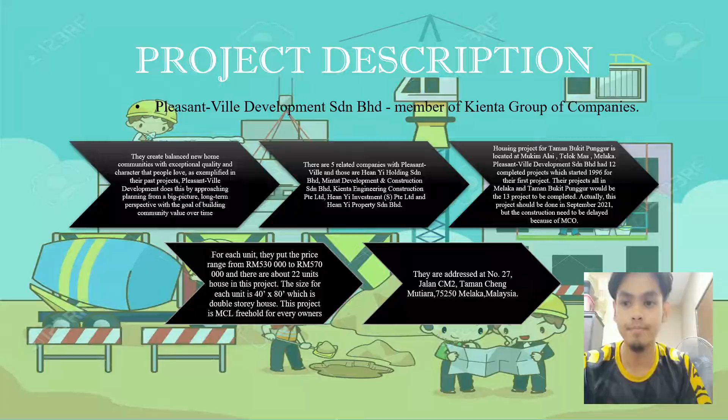Type of soil on site. So the type of soil on site we found is clay. Clay is the smallest particle amongst the other 2 types of soil. The particles in this soil are tightly packed together with each other with very little or no air space. This soil has very good water storage quality and makes it hard for moisture and air to penetrate into it.

It is very sticky to the touch when wet, but smooth when dry. Clay is the densest and heaviest type of soil which does not drain well or provide space for plant roots to flourish. And the reason why the house project can determine the type of soil is clay is because previously the construction site area of this house was a crop area and a paddy field area.

So the soil that is there contains water and the condition of the soil is moist. Similarly, the Telok Mas area is mostly a paddy field area, and the locals develop housing in the area. So next, there are a few advantages of clay soil. They can hold more total water than most other soil types, and although only about half of this is available to plants, crops seldom suffer from drought.

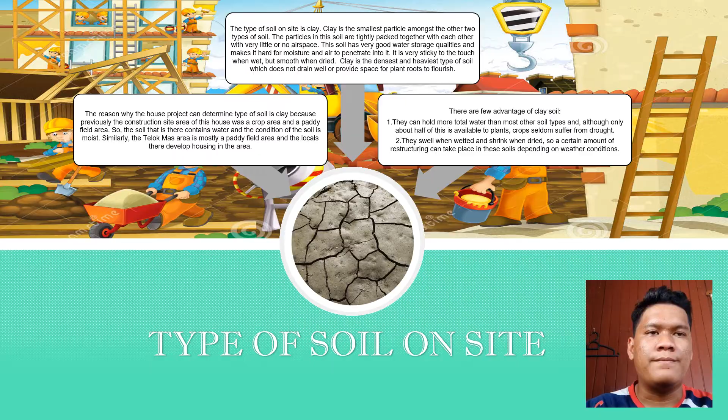And next, they swell when wet and shrink when dry. So a certain amount of restructuring can take place in the soils depending on weather conditions. So the type of foundation used on site is slab foundation. So first, slab foundation is a large thick slab of concrete that is typically 4 to 6 thick in the center and poured directly on the ground all at one time.

The edges of the slab are thicker, as wide as 24, in order to allow for extra strength around the perimeter. Many foundations utilize post tension cables while others are reinforced with steel rods or rebar. These materials are used in order to make the slab extremely sturdy and capable of bearing the weight of the house or other structure.

And a concrete slab does not have a crawl space underneath it. This type of foundation differs from house foundation with basement in this respect. There is no space under the floor. Basements are typically found where the weather gets very cold.

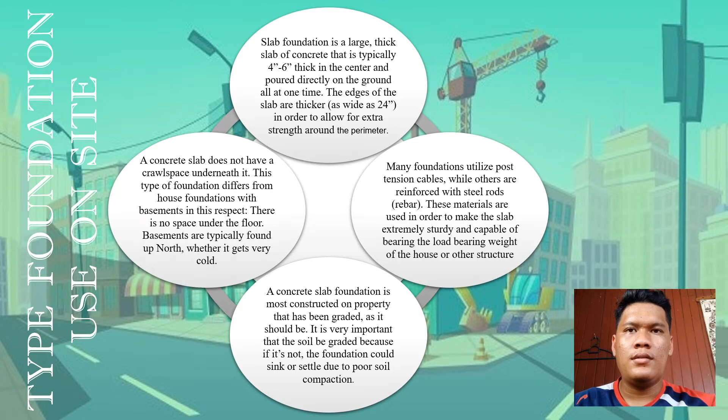So a concrete slab foundation is most commonly constructed on property that has been graded as it should be. It is very important that the soil be graded because if it's not, the foundation could sink or settle due to poor soil compaction.

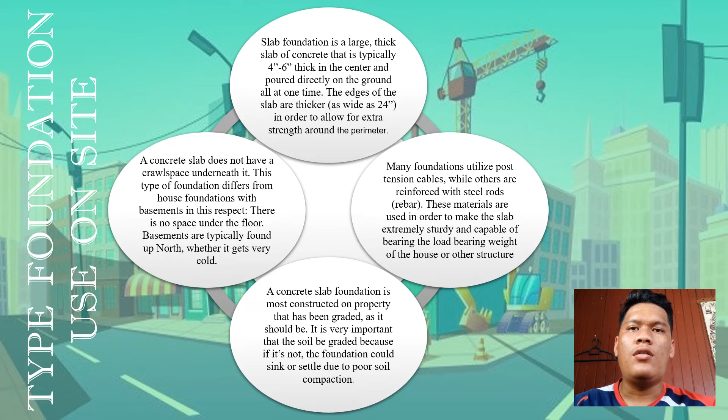So the reason why slab foundation is used on this house project is it has a few advantages for this house. For example, these foundations are generally less expensive to construct than pier foundations. It doesn't take long to create them. The slab itself is poured in a single day.

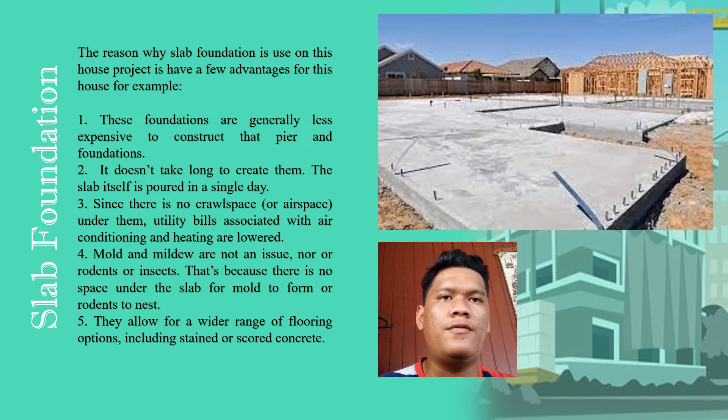Since there is no crawl space or air space under them, utility bills associated with air conditioning and heating are lower. Mold and mildew are not an issue, nor are rodents or insects. That's because there is no space under the slab for mold to form or rodents to nest. Lastly, they allow for a wider range of flooring options, including stained or scored concrete.

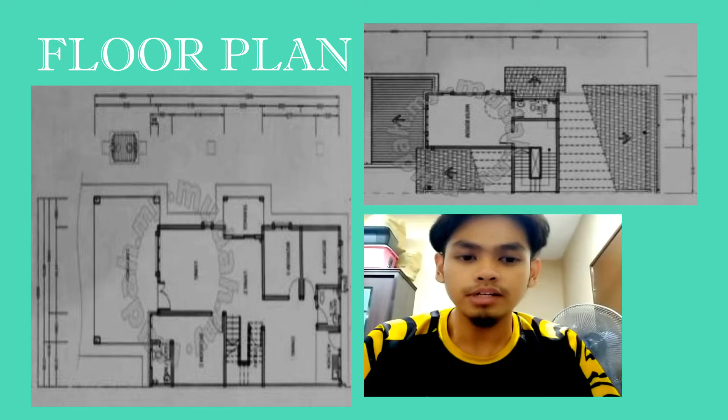The house foundation is concrete slab because it is the most common type of foundation for housing projects. It is also one of the most budget-friendly and straightforward to build. As the name suggests, it is a foundation of concrete slab that is around 6 to 8 inches thick. The concrete is poured into a gravel mixture on the soil's surface.

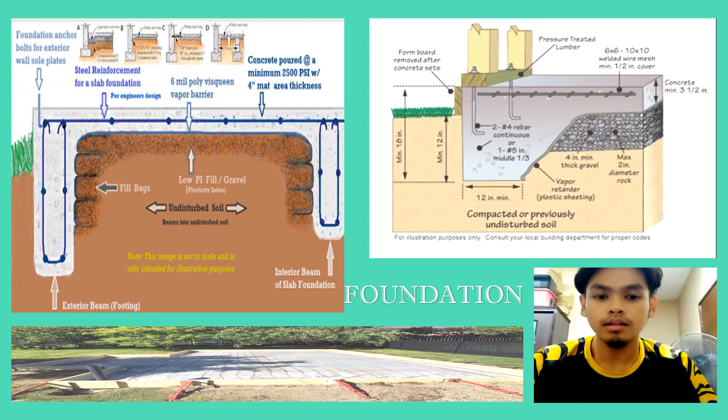Right now, I would like to present our foundation drawing. So basically, we have 28 in total of deep foundations and the area of 321.3 square meters of slab foundation. The area of the slab foundation: basically, we have a width of 15.3 meters and a length of 21 meters.

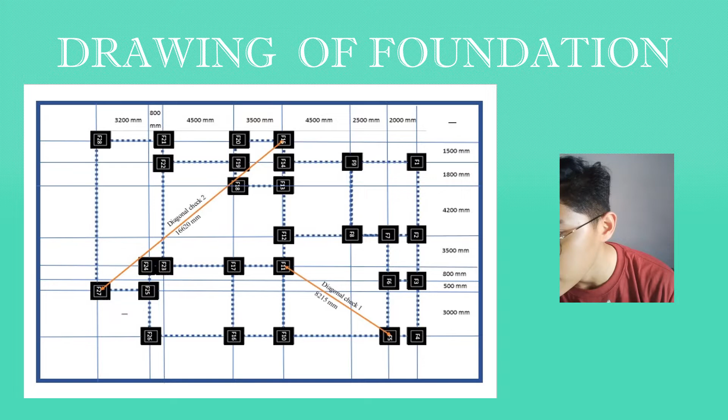In our drawing, we use two diagonal checks, each using 3 points. For the first, we use F5, F11, and F10 to generate a square. So diagonal check 1 shows that we have

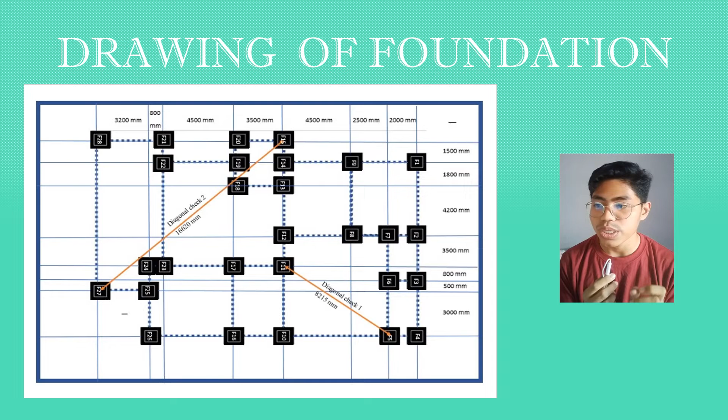8,215 millimeters, while for diagonal check 2, we use points F15, F27, and F28, which shows 16,620 millimeters. So the diagonal check actually helps us do accurate calculation and get an accurate shape of the foundation.

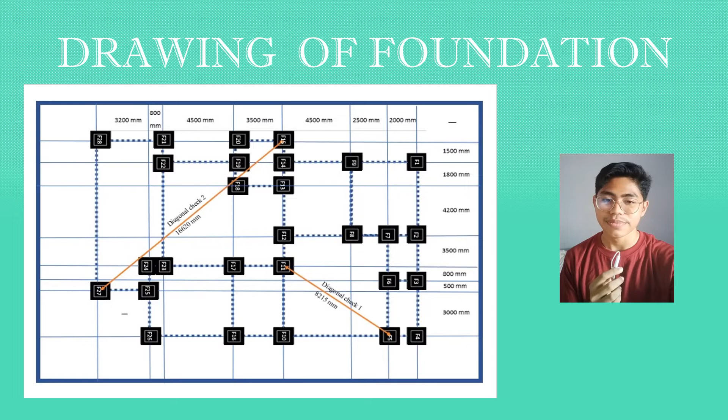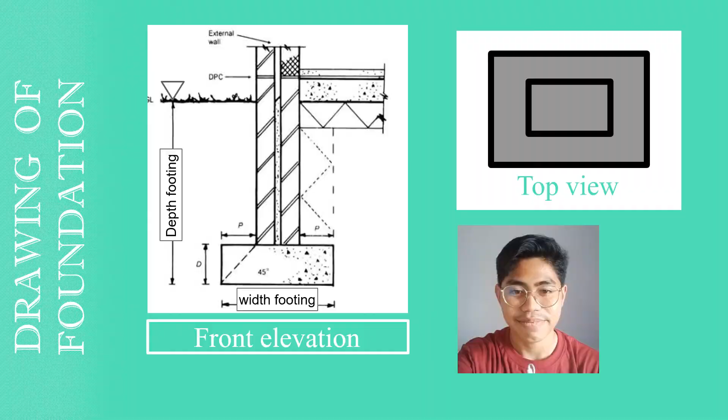So the housing project that is being carried out in the Alai area, Telok Mas, Melaka, is a housing project developed in the crop area and the paddy field area. This area has a clay type soil where the soil contains water, which causes the soil to be a little moist. This project uses a slab foundation in building a house.

Actually, there are various types of foundation used, but this project uses a slab foundation based on the picture shown above. In addition, slab foundation is also one of the simple methods that has been known since ancient times. So employees from Kienta Group chose the slab foundation as it is easier and faster in the construction of a house. Similarly, the slab foundation requires only 1 day to prepare.

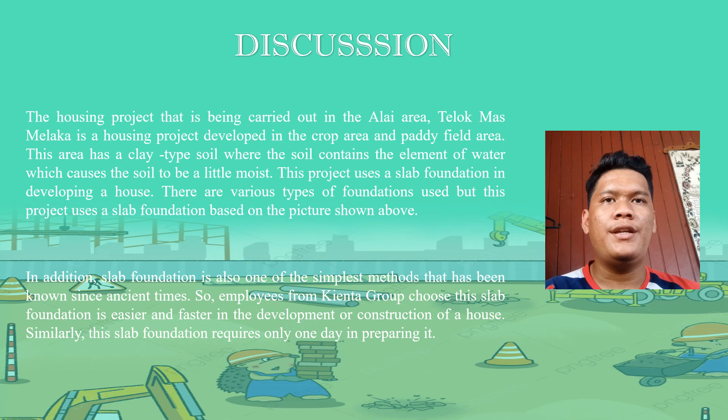Alright, in conclusion, foundation is an important process in construction work as it is the backbone of a good structure. We must choose the best foundation based on the suitable allowable bearing capacity and load. As engineers, we must always be alert and not take lightly every detail of the construction, as it could affect public safety and the environment.

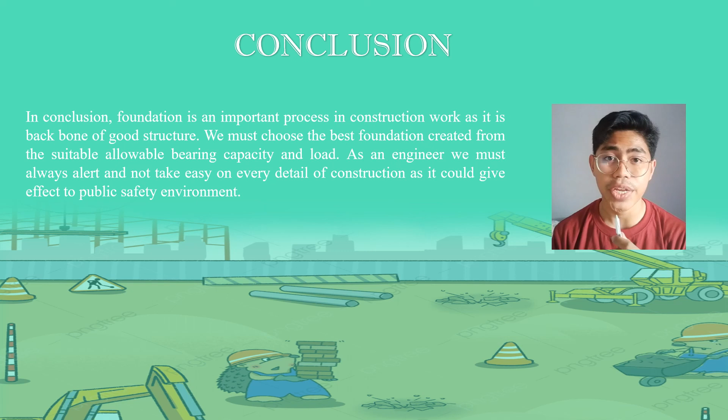So we should do our best to create a very good building from A to Z. The same goes here for our foundation. The foundation gives the best structure to our building so that we can create a really good environment, especially for the public.